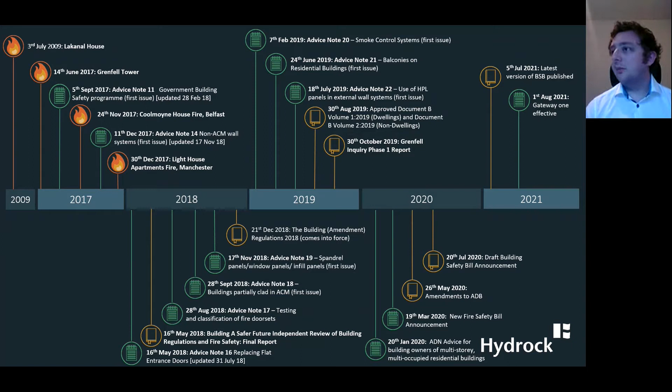So the draft bill itself was published by government on the 20th of July 2020 last year for pre-legislative scrutiny, and the latest revision was actually published this year on the 5th of July. Due to space restrictions, there's a couple of things we've missed off the timeline, but just to note what they were: the government response to the Grenfell Inquiry Phase 1 report, and the government response to the Judith Hackitt report, which is one of the key documents leading to the development of the Building Safety Bill.

So the draft Building Safety Bill aims to drive the biggest change to building safety regulation in nearly 40 years. The objectives of the bill are to learn the lessons from the Grenfell Tower fire, to remedy the systematic failure issues identified by the Dame Judith Hackitt inquiry, and strengthen the whole regulatory system in relation to building safety.

The bill aims to introduce greater accountability and responsibility for fire and structural safety issues throughout the building life cycle. The bill contains wide-ranging changes, from new and more stringent requirements on building safety standards, to the introduction of a new building safety regulator to provide stronger oversight of safety and performance of all buildings, especially those classed as higher risk buildings, which I'll come on to define a bit later in the presentation.

The main sections of the bill, which I'll be talking about today, are the building safety regulator and its functions, building control authorities and building regulation outlining the reform of the building control system, the definition of high-risk buildings during occupation, and supplementary and general provisions.

In the following few slides, I'm going to discuss briefly the definition of high-risk building, the key points of the new regulation regime, and the role of the new building safety regulator.

But before I do, I just wanted to provide a couple more details regarding the bill itself and the expected timescales of the bill. What you can see on the screen at the moment, please note, are not guaranteed dates for implementation of the bill. These are estimates that are relatively accepted.

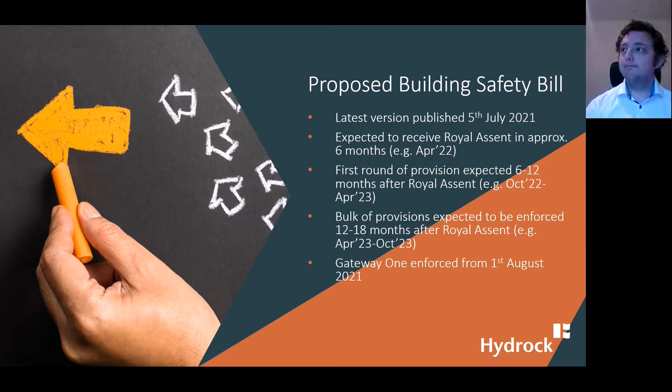As the Building Safety Bill aims to implement a stringent regulatory regime for higher risk buildings, it's really important that we clarify the definition of higher risk buildings, which in essence defines the scope of the bill.

The Building Safety Bill does, however, give the Secretary of State the power to define the scope of higher risk buildings by regulation, under the advisement of the Building Safety Regulator.

But for now, the proposed definition of high risk buildings includes buildings with a height greater than 18 metres, or a storey more than 18 metres above ground level, or a building with 7 or more storeys and 2 or more dwellings and rooms for residential purpose. It does include student accommodation.

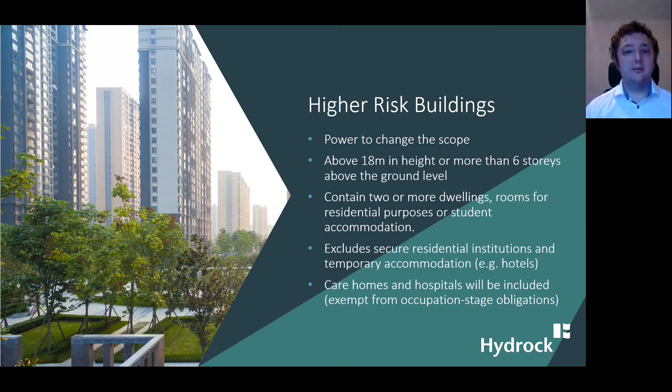The higher risk buildings descriptions and supplementary provisions regulations, which was published in draft with the bill, provide that care homes and hospitals will be high risk buildings. However, they will not be subject to the occupation stage obligations of the bill, so it will only be relevant for new buildings up to occupation stage.

So as I mentioned, a more stringent regulatory regime will be introduced for higher risk buildings, for which the key elements are summarised on the slide. It includes the introduction of duty holders and accountable persons system throughout the life cycle of the building, the introduction of gateway points, which are essentially stop-go decision points within design and construction, the requirement for a golden thread of building information to be curated, stored and updated throughout the building's life cycle by creating a building safety case, and a mandatory reporting system of fire and structural safety occurrences. It also includes the introduction of a building registration and assurance certificate for high-risk buildings, the implementation of various responsibilities for the accountable person in relation to the occupied building, and the requirement to engage and develop a stronger partnership with residents to keep the building safe through transparency and effective complaints handling, which I'm going to cover in almost all of these points throughout the presentation.

But clearly, the new regulatory regime is going to result in significant change. So, in order to enforce this and ensure ongoing effectiveness of the new regime, the role of the building safety regulator, which will be housed within the Health and Safety Executive, will be created. It's going to be a national role that oversees the building safety system with very broad responsibilities and functions, which fall into three main categories.

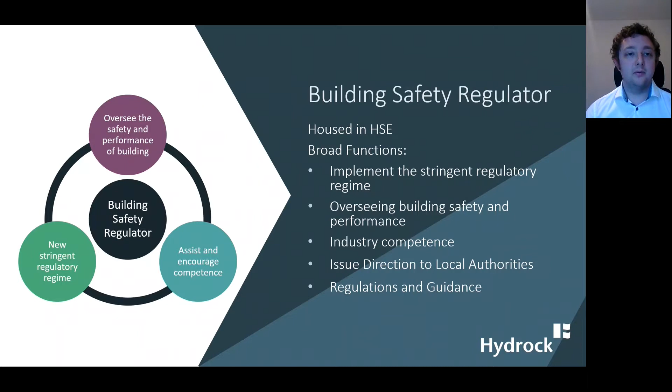So to assist the building safety regulator in carrying out its functions, it will have the power to establish and direct committees to advise on building functions. From the beginning, there'll be three specific committees, which are the Building Advisory Committee, the Industry Competence Committee, and the Residents Panel.

And then the Residents Panel is designed to improve communication between the residents of higher risk buildings and the regulatory authorities. The panel will consist of high-risk building residents and relevant other persons, whoever the building safety regulator considers appropriate, and the regulator is required to consult the residents panel before issuing or revising certain guidance related to residents of high-risk buildings.

In addition to the creation of these committees, the building safety regulator will also have the power to issue direction to local government and fire rescue service authorities to assist the regulator in meeting its functions. And the regulator will also be responsible for making recommendations to the Secretary of State regarding introducing new regulation and guidance relating to fire and structural risk in buildings.

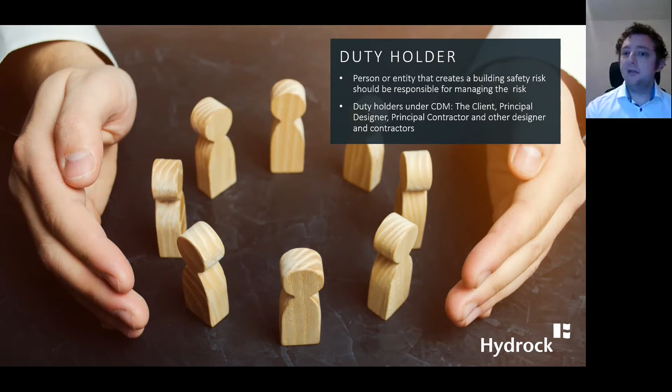The responsibilities include ensuring the duty holder and the people they employ are competent to do the work they're undertaking, which ties in with the competence requirements. The duty holder will cooperate and share information with the building safety regulator, maintaining the golden thread of information and establishing a framework for mandatory structural and fire risk occurrence reporting, which ties in with the golden thread requirements. The duty holder will also comply with building regulations and the specific regulatory requirements imposed upon them, whatever requirements are relevant to them for the purposes of the gateway submissions. So I'm going to go into each one of these in more detail as we progress through the presentation.

The proposed bill will create powers to prescribe in building regulations competence requirements of the principal designer and principal contractor, and any other prescribed person involved in the design, construction and occupation, to impose duties on the persons appointing them and to ensure they meet the competency requirements. Although these powers will apply to all buildings, the requirements will be more stringent for higher risk defined buildings, significantly, the client will be required to sign a declaration that they are satisfied that the principal designer and the principal contractor are competent.

This might imply that some procurement activities, for example, pre-qualification processes, would need enhancing to ensure competence is fully assessed and evidenced prior to appointment and going into contract.

So the draft Building Safety Bill places responsibility on the duty holders to cooperate and share golden thread information to ensure that the right people have the right information at the right time, to ensure buildings are safe and building safety risks are managed throughout the building's life cycle. These responsibilities go significantly beyond the current requirements for information sharing within the CDM. Previously, the CDM concentrated on managing health and safety in the process of carrying out the work, rather than how safe the completed building is going to be and the safety of the occupants in and around the building.

It strengthens the current building control full plan pre-site approval stage, where a duty holder has to provide the building control body, or the building safety regulator, with their full design intention. Construction work cannot start until the building safety regulator is satisfied that the duty holder's design meets the functional requirements of the building regulations and does not contain any unrealistic safety management expectation. So the duty holders should submit key information to demonstrate how the building, once built, will comply with the building regulations, including design decisions relating to fire and structural safety, demonstrating they've been well considered and justified at this stage.

It's our Hydrock expectation that the information request for the application will be based on the safety case, which is also discussed within the bill. This process may have an impact on the ability to implement design changes during the construction phase and once Gateway 2 sign-off has been achieved.

So Gateway 2 could be one of the biggest impacts. It could significantly impact the whole process from initial design to post-contract design changes. With the intention to mitigate approval risk, the contractor will have to confirm Gateway 2 sign-off before agreeing a contract sum and commencing construction work. They may also want to reduce design changes in the construction stage to reduce the approval risk in the Gateway 3 application. So it's expected that longer design periods will be required, and earlier coordination and engagement with relevant subcontractors may be needed to mitigate any risk with the Gateway 2 application or further Gateway 3 application.

So Gateway 3 is at the completion or final certificate phase, where the building work has been finished. The duty holders will be required to submit to the Office of the Building Safety Regulator all relevant documentation and information, essentially the safety case and the golden thread, on the final as-built building. The Building Safety Regulator will then assess whether the building work has been carried out in accordance with building regulations prior to issuing the completion certificate.

And prior to receiving the completion certificate, the building cannot yet be occupied. The project can only be deemed completed after the completion certificate is issued, at which point the prescribed documents and information must be handed over to the accountable person for the occupation phase.

Again, Hydrock expects that the introduction of these three gateways will have a major impact on project programmes, extending them to allow for gathering information for submission at each relevant gateway as if it were a new planning application or building control application. And it will definitely involve responding to queries from the Building Safety Regulator at each stage.

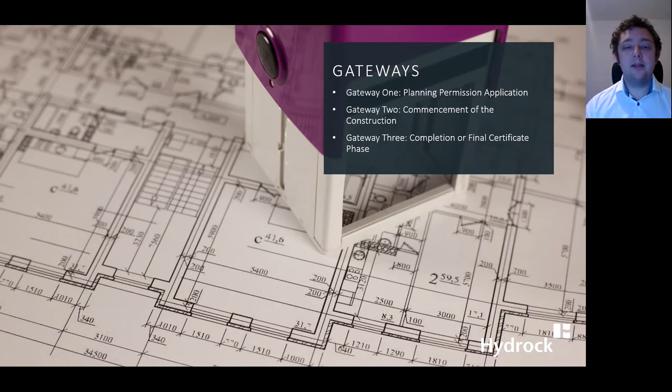As mentioned, Gateway 1 has already taken effect, coming into effect on the 1st of August this year. Gateway 1 essentially ensures that fire safety matters relating to land use planning are incorporated at the planning stage for schemes involving a relevant high-rise residential building. The objective is that before planning permission is granted, planning applicants will now be required to submit a fire statement, as it's named, to the local planning authorities, who should then consult the fire and rescue authority or the building safety regulator to ensure early consideration of fire safety.

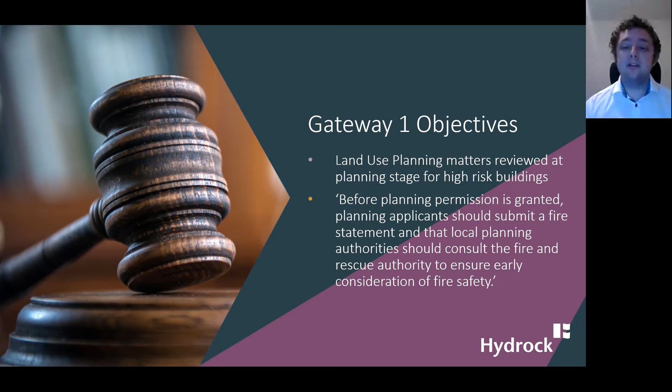The buildings in scope of Gateway 1 are essentially exactly the same as the Building Safety Bill. It's applicable to residential buildings containing 2 or more dwellings and a storey more than 18 metres above ground level, or 7 or more storeys. And it does include boarding houses and student accommodation.

The fire statement document itself—the fire safety matters contained in a fire statement—are relevant only to the extent that they're relevant to land use planning. So the level of detail and focus of information is not required to contain all information related to fire safety, which would be submitted for a general building control application stage, for example. It won't, for example, include internal layouts of apartments within the Gateway 1 fire statement.

It's in a fixed format for fire engineers to provide brief and specific responses to relevant aspects of the proposed development. And the prescriptive format is intended to gain a level of consistency so that not all fire engineers are submitting a completely different document, and it allows the building safety regulator or the reviewing authority to adequately compare and ensure that a satisfactory level of safety is being achieved.

It does also provide guidance on word counts to ensure responses are brief and specific, but this is one of our concerns, that we need to make sure fire engineers are permitted enough space to adequately detail proposals, especially for complex sites which may include multiple blocks or different strategies across the site.

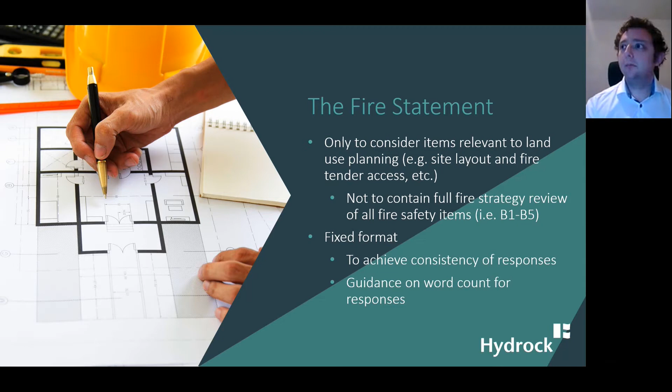Similarly, in the same vein as the rest of the Building Safety Bill, there are competence requirements set up for the completion of the Gateway 1 fire statement.

The associated guidance of the fire statement recommends that fire statements are completed by a suitably qualified engineer with relevant experience in fire safety, such as a chartered engineer registered with the Engineering Council by the Institution of Fire Engineers, the IFE, or a suitably qualified and competent professional with demonstrable experience to address the complexity of the design being proposed in terms of fire safety.

There's approximately just over 300 chartered fire engineers affiliated with the IFE in the UK at the moment. And with the current insurance market tightening as it is, there may be even less of those with sufficient cover to work on high-rise residential buildings.

So in order to meet this, there's going to have to be an increase in capacity. Even the impact assessment of the Building Safety Bill document acknowledges that future work is expected to require an increase of at least 50% in fire engineering capacity.

So from a fire engineering perspective, the new Building Safety Bill Gateway 1 will obviously result in earlier required fire engineering input for high-rise residential buildings, firstly as it requires a qualified and suitably competent fire engineer to complete the fire statement.

But additionally, as we know, many more complex developments may not comply with prescriptive guidance with regard to items related to land use planning, those items that need to be addressed as part of the Gateway 1 fire statement.

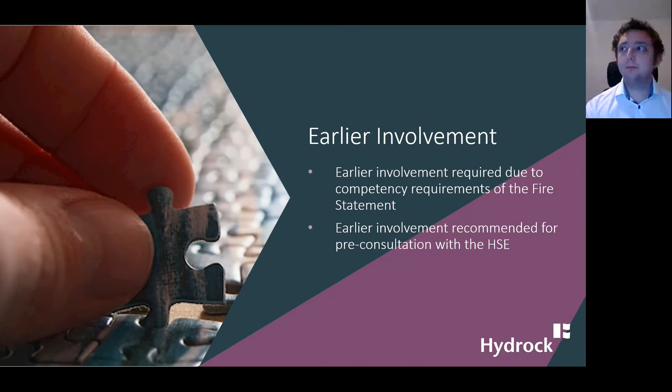The final quick point I wanted to touch on regarding the new Gateway 1 is how it ties in with the London Plan. Policy D12B of the London Plan, last released in March 2021, states that all major development proposals should be submitted with a similarly named fire statement, which is an independent fire strategy produced by a third party and suitably qualified assessor.

The policy specifies that the fire statement should detail how the development proposal will function in terms of the building construction, materials and methods, in terms of means of escape and associated evacuation strategies, features which reduce the risk to life, which include fire alarm systems and passive and active fire protection systems, and associated management and maintenance systems for those plans and systems.

Access for the fire service, how this will be achieved in an evacuation situation, water supplies, provision and positioning of equipment, firefighting shafts, how provision will be made within the curtilage of the site to enable fire appliances to gain access to the building, and finally ensuring that any potential modifications to the building will be taken into account and not compromise the base build fire safety.

So we can see that the requirements of the fire statement for both the London Plan and the Building Safety Bill Gateway 1 are similar, but they differ in terms of their content, format and requirements. Both the London Plan and Gateway 1 are relatively new proposals, and at the moment both seem to be required for planning applications where a development is in scope of both the London Plan and Building Safety Bill Gateway 1.

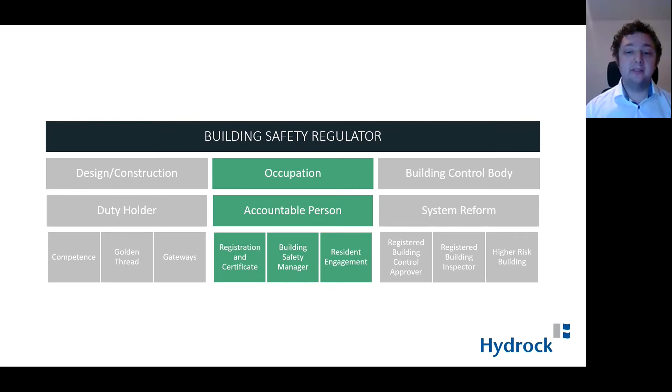So as I mentioned before, responsibility and accountability will be transferred during occupation from the duty holders to the accountable person. The draft bill sets out the responsibilities of the accountable person and how they will be expected to interact with the building safety regulator and residents, which I'll come on to in the next couple of slides.

So the accountable person for a higher-risk building is described as a person who holds a legal estate in possession, in part or in all of the common parts, or a person who is under a relevant repairing obligation in relation to any part of the common parts.

The responsibilities are quite broad, but as summarised on the slide, the accountable person needs to register the building with the building safety regulator before occupation and to apply for or renew a building assurance certificate. The accountable person needs to appoint a building safety manager for all higher risk buildings to support the day-to-day management of fire and structural safety. They need to create and maintain a resident engagement strategy. They also need to manage and retain the building safety case. And finally, they need to take all necessary steps to prevent major incidents and ensure that the building has adequate insurance to cover losses associated with those building safety risks.

So as I mentioned previously, following the completion of the higher-risk building, either newly built or refurbished, the accountable person will need to register the building with the building safety regulator and to have a building assurance certificate before they can occupy the building. This will also apply to existing buildings. They will also need to apply for a certificate.

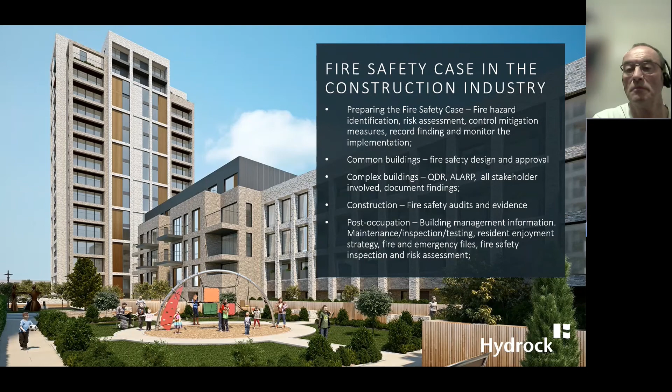Finally, just at a high level to finish the presentation, I wanted to say that at Hydrock we're very much of the opinion that we should embrace these changes. They are the biggest change in building safety in the last 40 years, and it can only be a benefit to strive to reach these ambitions prior to the implementation of the Building Safety Bill. We've stated it's going to be a number of years before it's fully in effect, but that's not to say that clients, developers and contractors shouldn't be starting to implement these changes as soon as they can, as we've seen with a number of our clients.

That completes the presentation, I'll pass you back to Elvin for any questions. Thank you, Chris, did you enjoy that? You did a good job, sir. Very much, good job my friend.

Okay, let's go through - there's a couple of interesting points being raised. Just to pick this up, from Margaret Saki: confirmation the Building Safety Regulator is already in place, brought in with Gateway 1.

Now, bringing up a point from John Adshead - he says the HSE appointed Peter Baker, HSE Director of Building Safety and Construction, as Chief Inspector of Buildings to set up the Building Safety Regulator. So would you like to clarify that for us, Chris?